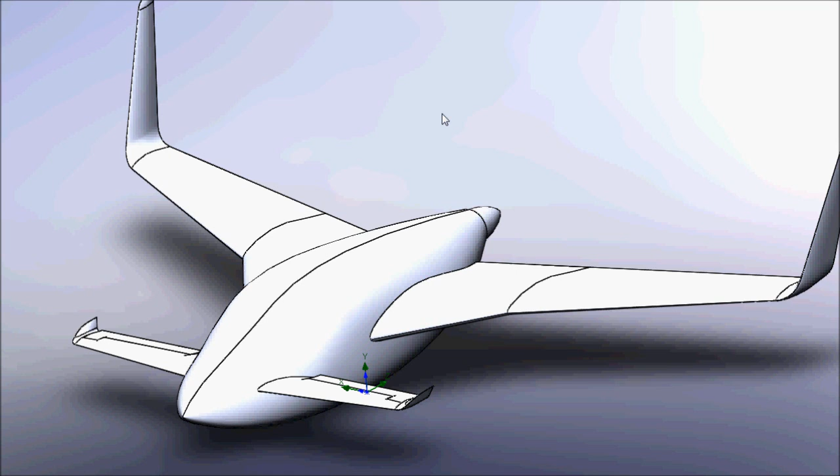We're going to ultimately be able to get the performance that I've been saying on the website. So as you see here, I've got the basic Raptor airframe here, and I've made it so you can adjust the elevator for each particular flow analysis, adjusting it up and down in relation to the pitch of the aircraft, so you're getting reasonable numbers from this flow simulation.

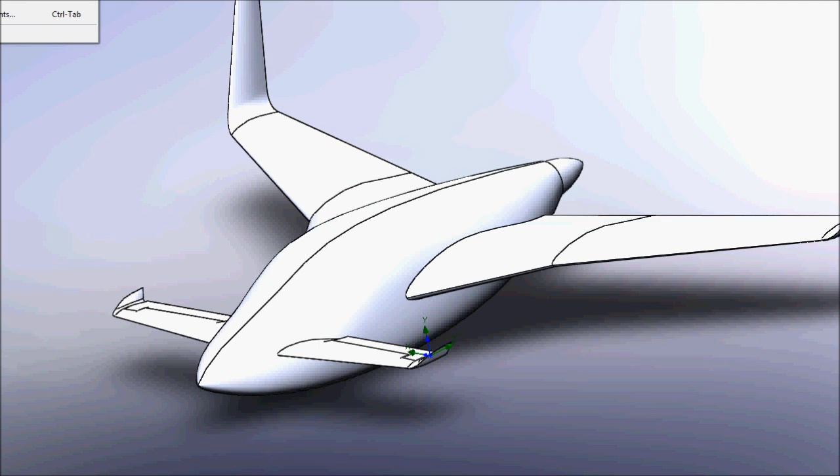If I switch over here, you'll see I also have the Cirrus SR22 that I've modeled here with the landing gear on it as well, and I've modeled the flaps for the slow speed calculations, and of course modeled the elevator as well.

I don't know the exact angles for the elevator for the different pitch attitudes, so I've had to estimate that for both aircraft.

For the slow speed handling of the Cirrus, I did the calculation at 70 knots indicated with 20 degrees of flaps, and all the other calculations are done with no flaps. Obviously on the Raptor there aren't any flaps, so I've basically set the elevator to what I think would be close depending on the angle of attack.

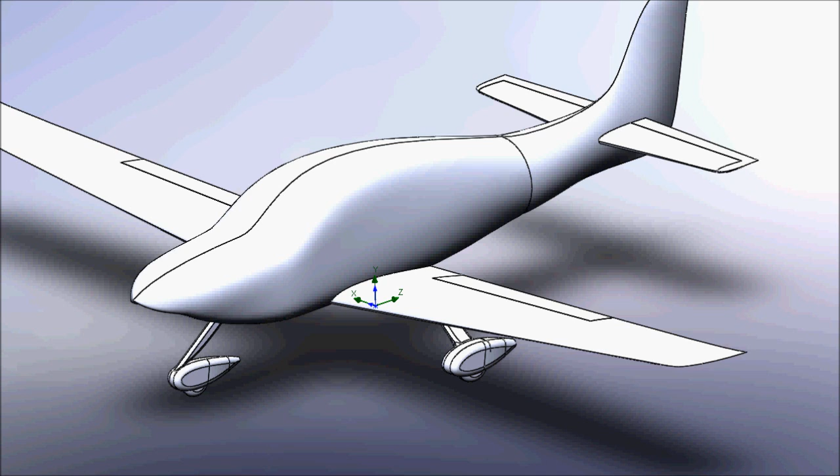That's kind of how it works. The way SolidWorks works with its simulations is you set up a simulation, adjust the airframe to whatever angle of attack you want, set the airspeed and a bunch of other settings, and choose the level of calculation - in other words, how long it will take and how detailed the analysis will be.

Then it gives you the results, and the results I've been coming back with are mainly the lift and drag, and also the pitching moment of the aircraft, just so I could see that it wasn't being pitched violently in one direction or another. That's how all the analysis is done.

Each analysis can take, depending on the resolution, anywhere from 5 minutes up to 45 minutes or more. So it's taken me a long time to go through all these numbers.

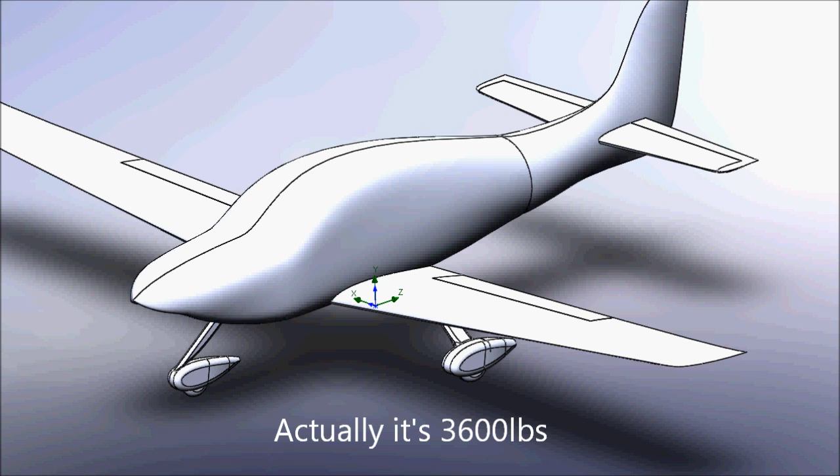I established a baseline whereby at a given angle of attack for the Cirrus, basically 0 degrees, at 185 knots indicated - slightly faster than the max speed of the Cirrus - I managed to get the flow simulation to tell me it was putting out exactly 3,600 pounds of lift, and give me the corresponding drag as well. Likewise I got the same number of about 3,600 pounds of lift with the Raptor, with about 0.65 degrees nose down attitude, at the same airspeed.

That was my baseline, and having that, I worked down the scale backwards all the way down to 70 knots indicated for the Cirrus.

On the Raptor I used slightly more angle of attack because it doesn't have flaps. The minimum speed I put was 75 knots, and I've charted all this, and it's up on the website. So that's an explanation of how I did everything.

So even though SolidWorks was giving me numbers in the low speed range that didn't match the amount of lift I was looking for in pounds - it gives the lift in newtons, but I was converting to pounds.

I wasn't really worried if it didn't give me the exact numbers, because really all I'm doing is comparing one airframe to another, and we know what the Cirrus can do. So I was just using those numbers from the Cirrus to extrapolate against the Raptor to determine what the Raptor is capable of.

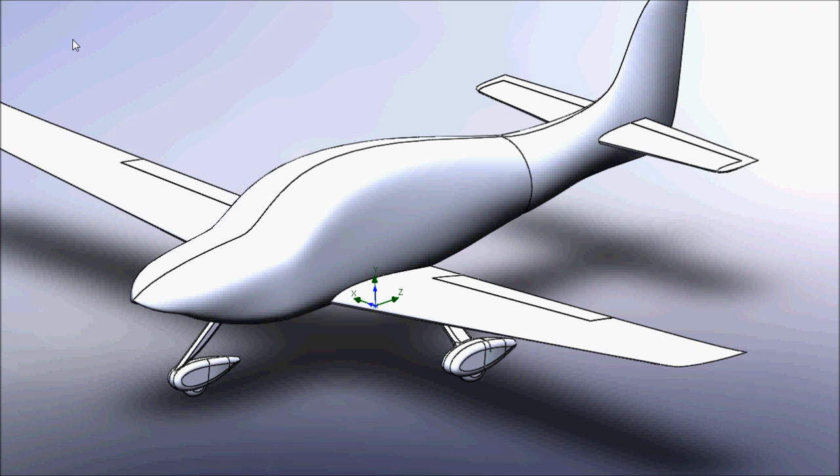So that covers the introduction, and in a second I'll show you some of the analysis results in graphical form.

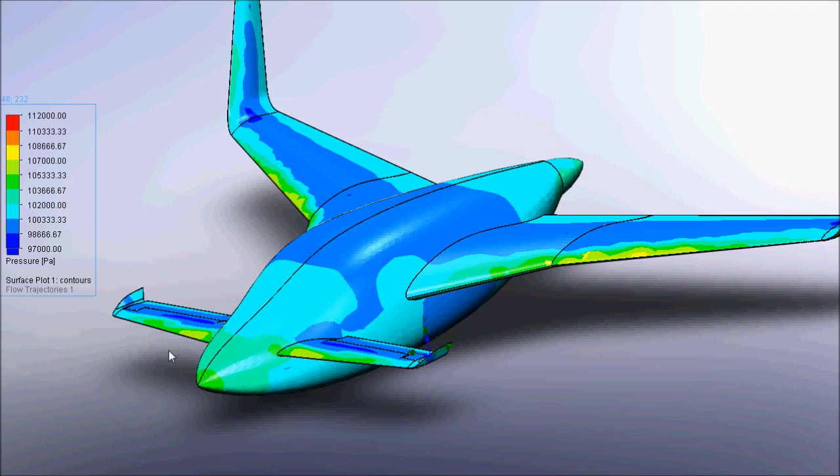Let me switch over and show you what the Cirrus looks like. Here you can see the Cirrus is fairly evenly distributed, although you've got areas of super low pressure right above the wing, which is where a lot of the lift is being generated. But notice on the leading edges here you have areas that are orange, areas of high pressure creating more drag, and also areas of slightly higher pressure on the landing gear, which creates a bit more drag as well.

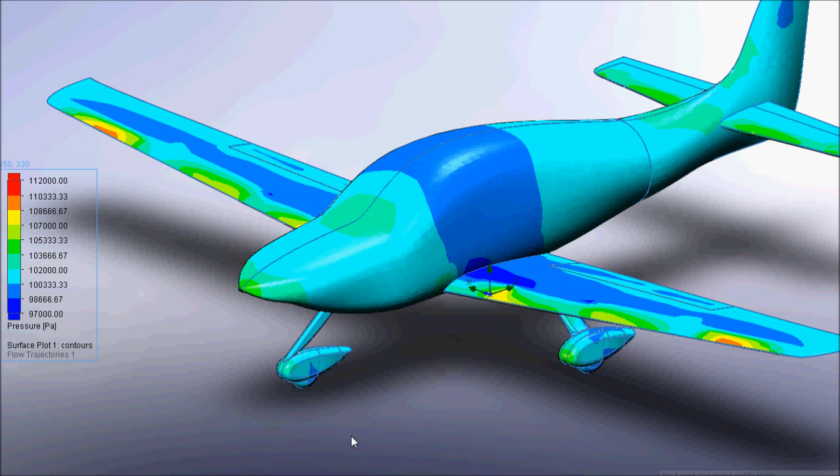So you can see from those comparisons that in general the Raptor has a much more even pressure distribution over the airframe. Next I'll show you a bit more about the flow analysis.

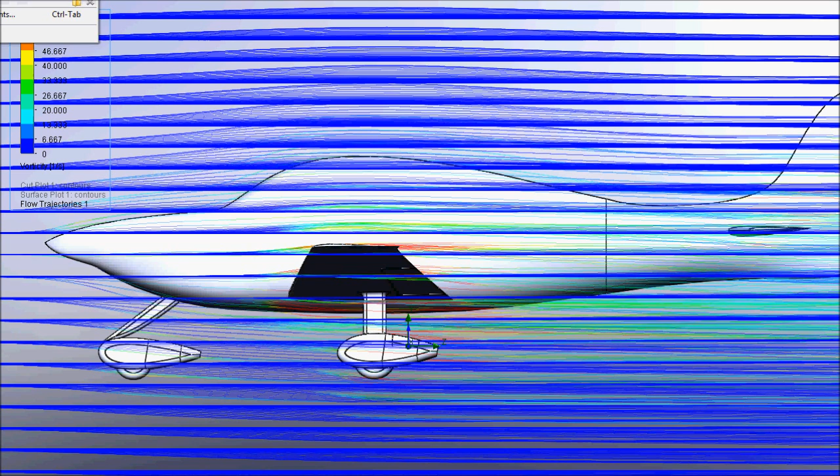So let's see, I'll switch over here and you can see how the Raptor looks, and it has the same type of problems and stuff. There's turbulence coming off the canard there because it's generating lift, and likewise off the main wing, but it's fairly smooth with respect to the whole airframe. There's nothing sticking out that's creating unnecessary turbulence. You're just getting what you need for lift.

And because the canard aircraft doesn't have a flap system, the main wing needs to have more area in general to generate that lift at low speed, and so ultimately at high speed it is not quite as efficient because it could be smaller, but it's not adjustable, so it is generating some drag there. But again, because you don't have this landing gear sticking out, and just in general because of the shape of the Raptor, you'll see it's generating less drag there, and you'll see from the chart there that these numbers come out from SolidWorks when you do the simulation.

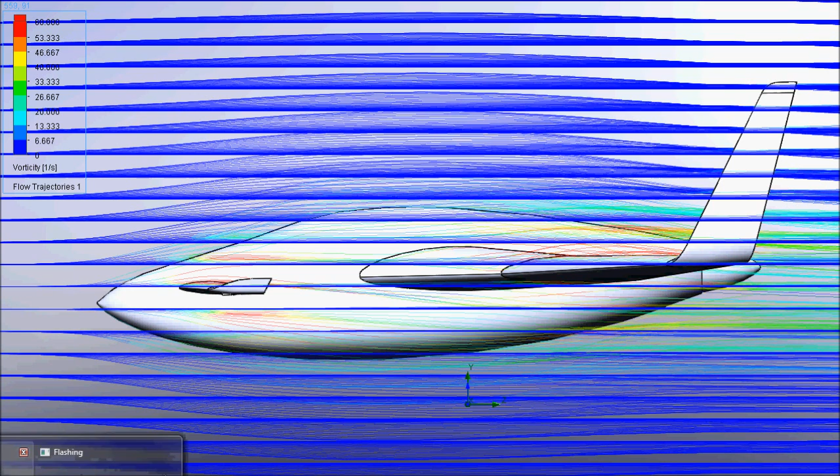So here next I'll show you what it looks like with the front view of the drag simulation here.

Okay, so here's the Cirrus with the front on view, and so there you can more easily see where the turbulence is being generated here. So these are all red marks here where turbulence is being generated from the lift over the wing, and you can see some of the red marks around here where the landing gear, and obviously some of the green marks.

And so there's a bunch of sort of generalized disturbance around the landing gear here, and then you've got the disturbance from the lift on the wing and then all the way out, and then underneath here, over here you've got your vortexes being generated from the wingtips on either side. And it's kind of interesting because they don't really use any sort of tips on the Cirrus, and they probably could and make some improvement to minimize those.

And then so you can kind of see that there's also some sort of orange colors here, isn't that? So there's kind of like a fairly messy bit of disturbance all around here, for various different reasons, the wingtips and the landing gear. Much of that is what's causing all this sort of swirl, and obviously all this turbulence creates drag, and that's what we're trying to eliminate.

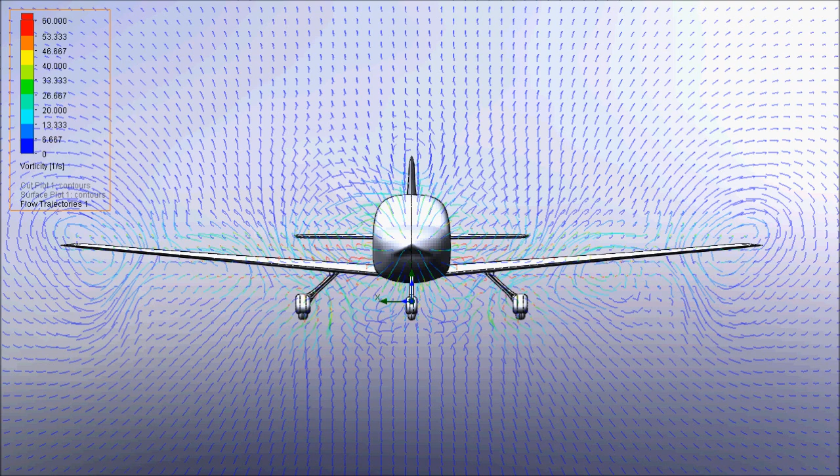So let me switch over here to the Raptor, and you'll see it's a much cleaner kind of look. Even though we have the winglets on here, they are still generating a vortex that sort of trails behind them, and you'll see that in a minute when I animate this. And then you're just getting sort of generalized turbulence because of lift, and most of that sort of trailing.

But yeah, it's fairly clean with respect to, or when compared with the Cirrus, and that's why, and you'll see on the chart there, and all the numbers that I have from all the simulations I've run, pretty much across the board, the drag for the same amount of lift is reduced by about 15% on the Raptor when compared with the Cirrus. So that's quite a large improvement, and that's why we're going to get the performance that I was hoping for out of this airframe.

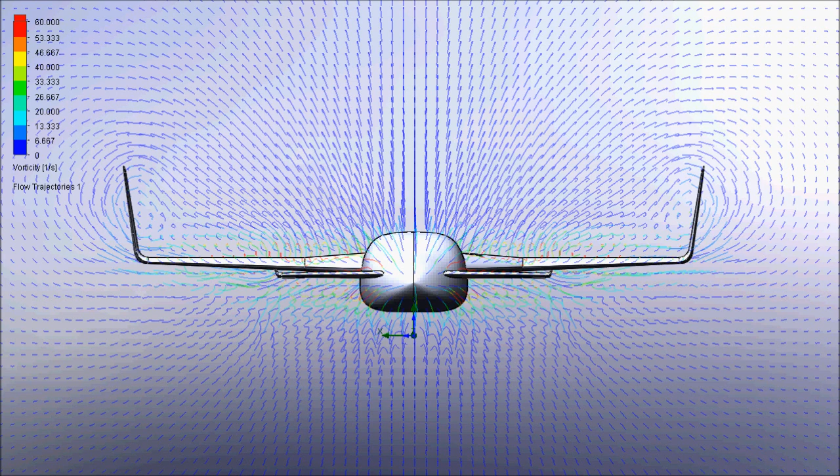So next I'll switch over and I'll show you the animation of how this all works. Okay, so here we're looking from the rear of the aircraft, and you'll see it animates the flow, and obviously the colors change with respect to the turbulence being created or the vorticity.

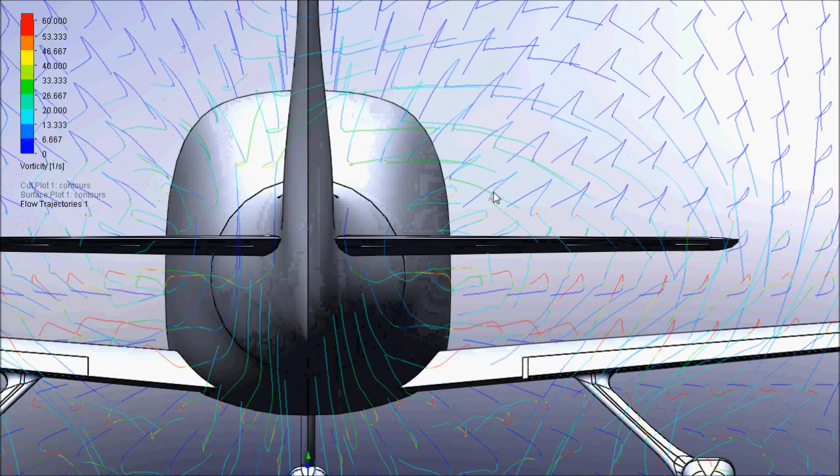So you'll see here, if I zoom in a little bit here, you can kind of see what's happening as the air comes down the airframe from the front to the back here, comes over the fuselage there, and sort of swirls around, and then of course it animates for another 20 feet or so behind the aircraft. So that what you see at the end there is what's happening trailing the aircraft.

So here you can see all the red lines, and that's basically where the turbulence is being generated from the lift there. And again, this is at 170 knots indicated.

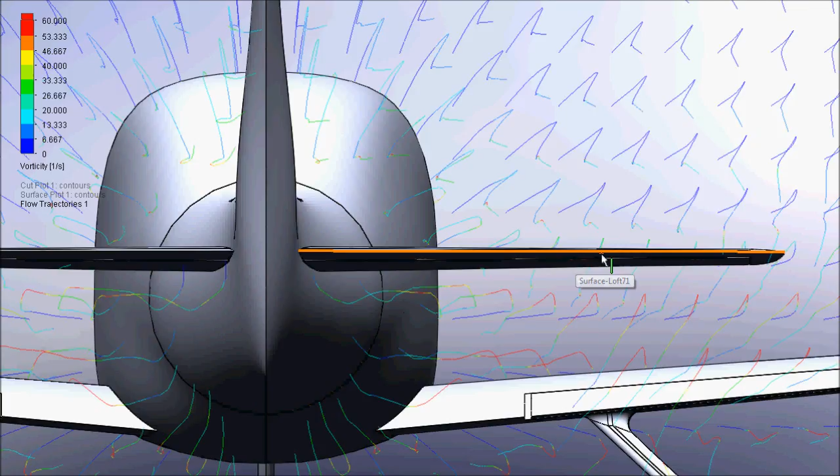So if I zoom out here and focus on the wingtip, you'll see here how the vortices are generated as the air crosses over the wing. It starts to swirl around like that. So it's kind of neat to be able to see that.

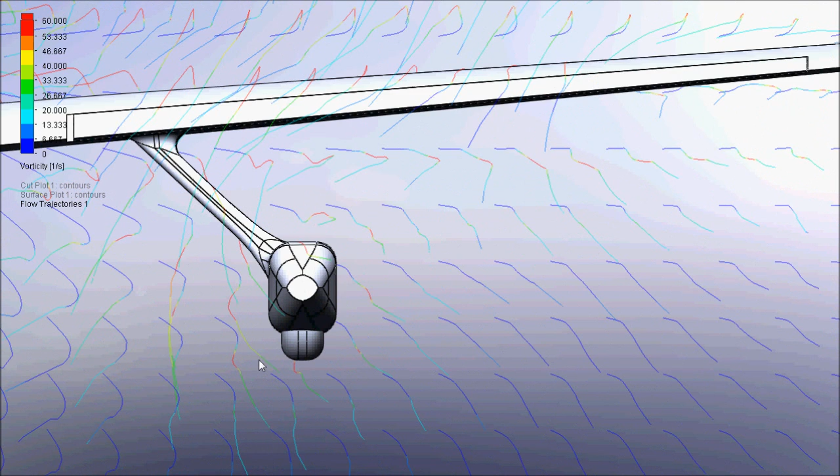So anyway, and then also too, if you look at the landing gear, you can see how as the air goes around it, it creates that turbulence, which is obviously creating the drag that is unavoidable with a fixed gear. And maybe it doesn't contribute a lot, but if you can eliminate it, then why not?

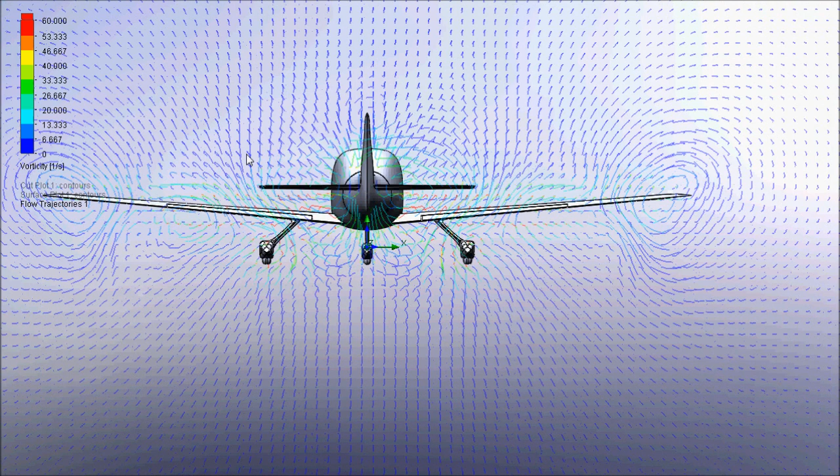So anyway, that's kind of how it looks if you're watching the animation of what happened there. And I'll switch over here and you can see how it looks on the Raptor.

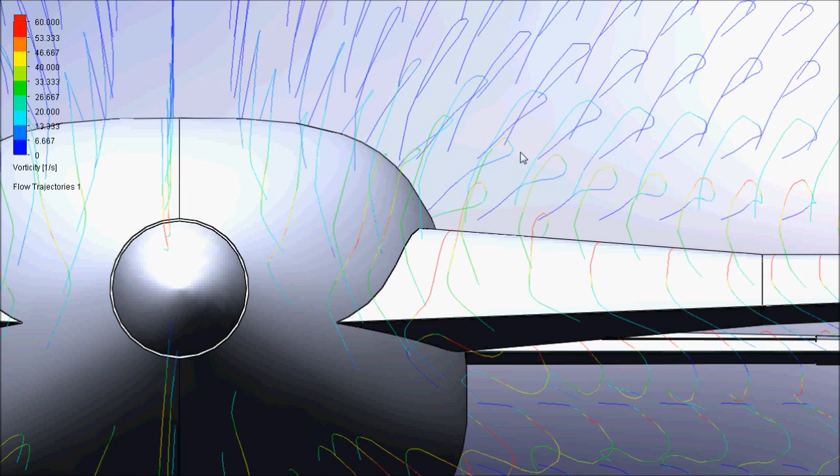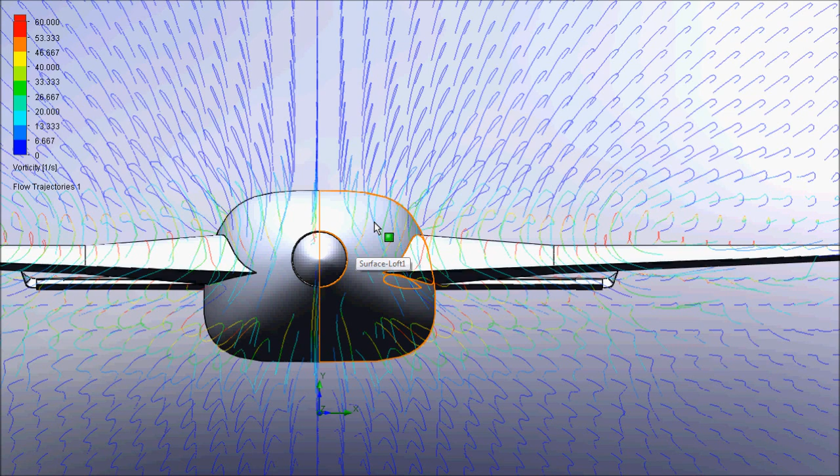Okay, so here we are with the Raptor, and you can see the same type of thing we saw before. We'll watch as the air comes over the fuselage and over the top surface of the wing, and you can see it swirls around a little bit, but there's only a minimal effect, nothing hanging down creating extra drag. And the larger fuselage isn't causing any problems or creating larger turbulence, because it narrows in nicely, like a smooth transition from small to large back to small again up the tail.

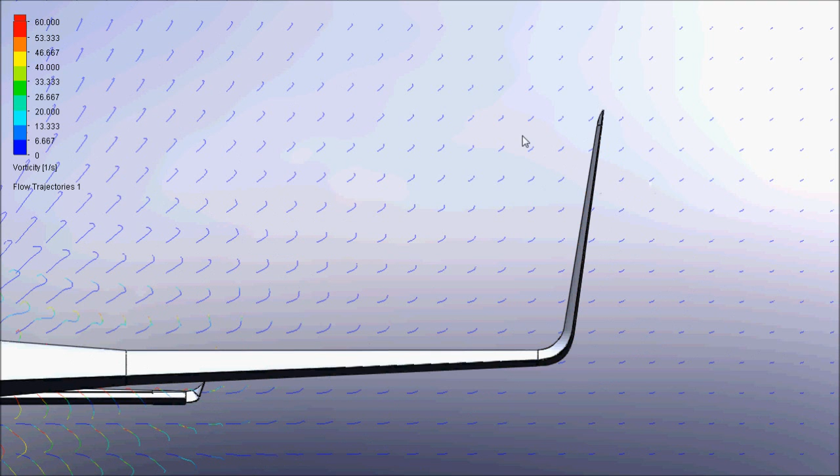So then you look at the wingtips here, and you'll see the vortex is pretty much coming from here as opposed to here, but you get a similar sort of effect, and I think it's kind of unavoidable. Anywhere there's generating lift, you're going to create a vortex, and this is set up to generate minimal lift. It's a very thin, narrow airfoil, so it's not going to create as large a vortex as what you would have just straight out on the wingtip over here.

So that gives you the summary there, just showing how the flow is going over the airframe. And it's kind of neat to be able to see that and see if there's any problem areas creating any sort of weird turbulence, but it looks fairly clean, at least in my eyes. I don't think I could improve on it anymore at this point.

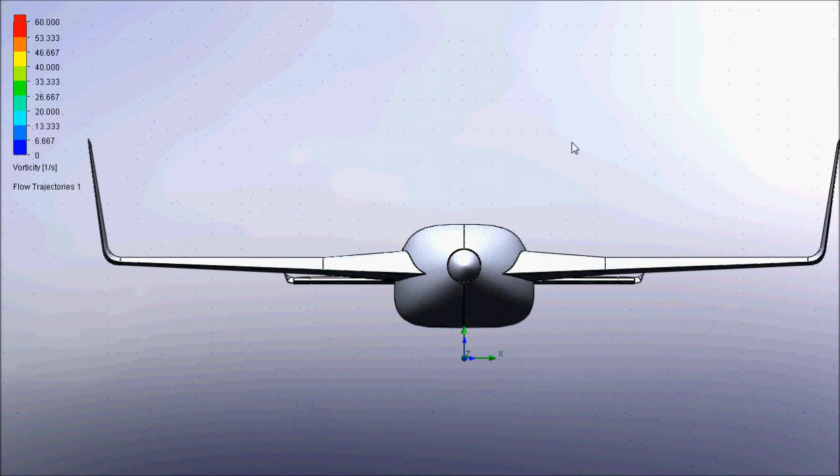So next I'm going to show you some of the data here, or at least the plotted data that I have, and explain what that tells us.

Okay, so here's a little bit of the data that I collected with all the simulations I was running, just to give you an example of what comes out of SolidWorks and what I was selecting. So here I've got the Raptor at 185 knots and level 6 simulation, which is fairly high. The angle of attack was negative 0.65 degrees, and this is the data you can export out of there. Obviously there's a lot more, but all I was choosing here was the first line is the lift, the second is the drag, and the next is the rotational moment, pitching moment.

And what I did over here, these numbers are all in newtons, so I'm taking the average value and multiplying that by 0.225 to convert it to pounds. So the lift here is 3,602 pounds, and the corresponding drag is 1,616 pounds, and the lift to drag ratio was 2.22, and again that was at 185 knots.

And for the Cirrus, same type of simulation, level 6, and this was at 0 degree angle, and I experimented with different angles, and that was the one that produced the number I was looking for in terms of lift. So I got 3,649, so almost the same amount of lift in pounds, and the drag was 1,913 pounds. So you see the lift to drag ratio there is much lower, 1.9, and obviously the drag is higher.

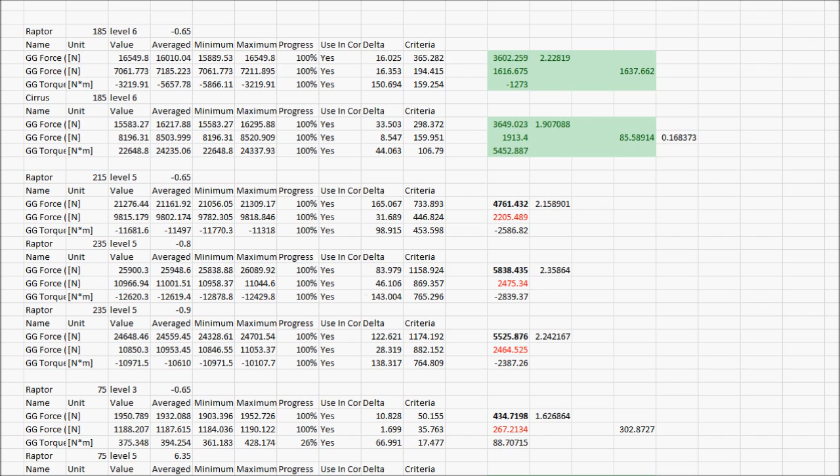It turns out in these numbers over here, basically what I did was I normalized the drag based upon the lift to get a 1,637 normalized against the Cirrus, and then I took that number and compared it with this, and I see that it's 85% of that. So the 1,637 is 85%, so we've got a 15% reduction in drag. I have loads of numbers that I've done on this to get all the information, but next let me show you this chart that I have.

Okay, so this is the chart that I generated from the data, and I didn't put all the data on here because it would have gotten too messy.

I took some data points, there's my initial point at 185 for both aircraft, and then I did the minimum or stall speed on the Cirrus at 70 knots, and 75 knots for the Raptor because it'll have a slightly higher minimum flying speed, even though it doesn't stall, minimum flying speed.

And then I plotted the lift up here for both, and you see I also plotted some extra ones in here, at 175 knots for the Raptor, and these high ones here, 215 and 235 knots again for the Raptor, just because I wanted to throw some extra numbers in. I didn't think there was any point doing that on the Cirrus because it doesn't go that fast.

So really what I wanted to do, as I was telling you before, ultimately it would have been nice to be able to prove that I could have 3,600 pounds across the board here, but for some reason I can't get SolidWorks to give me that, so I think I'm doing something wrong with my calculations or whatever. But the fact that I could prove this baseline of 3,600 pounds of lift at what would be the maximum cruise speed was really the point that I needed as a starting point.

So really it doesn't matter how SolidWorks calculates this. I'm just comparing one airframe to the other and using that to determine the percentage improvement of the Raptor over the Cirrus. Here you can see the drag curves, the red one is the Cirrus and the orange one is the Raptor, and you can see pretty much across the board it's a 15% decrease in drag.

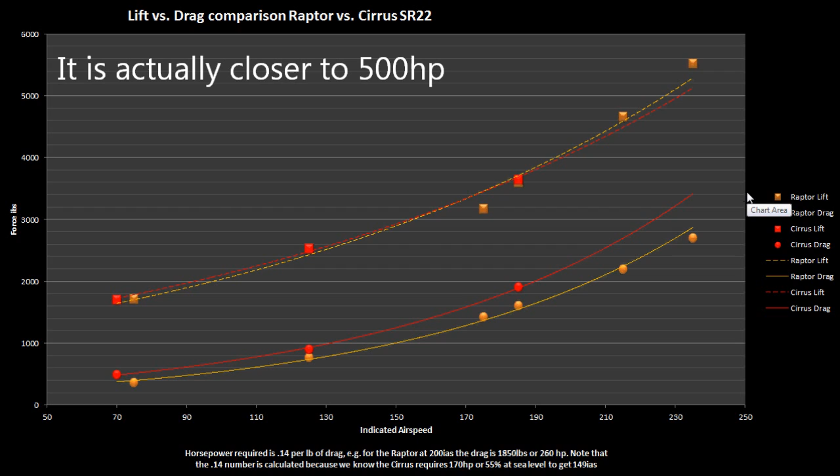I did a calculation for getting 250 knots indicated, and you would need about 500 horsepower, I think was the number I came up with. But you could extrapolate this chart and figure it out for yourself.

These numbers may vary by as much as plus or minus 5%, but I think they're fairly accurate, because every time I went with the Cirrus and took the book numbers for 65%, 75% and 55% power, and used the true airspeeds they provided at altitude, converting them back to indicated airspeeds and plugging that in, I was literally hitting the chart every time and getting around the same 0.14 number. It might vary a little—sometimes 0.135, other times closer to 0.15—but it's somewhere in there.

So I think I've achieved what I wanted to do with this airframe. We're going to have a 300 knot aircraft that gets there on about 260 horsepower, which is actually better than I thought, because I expected we'd need about 300 horsepower, but we should be able to get there at 25,000 feet on about 260 horsepower if everything goes good.

One of the other things I was interested in looking at on this chart—everybody knows that drag increases with the square of your speed. So I was doing some calculations here, and it's not quite that, because if you're at 70 knots over here and you go to 230 knots, the drag here, if it's just under 400, should be going up to about 3,900.

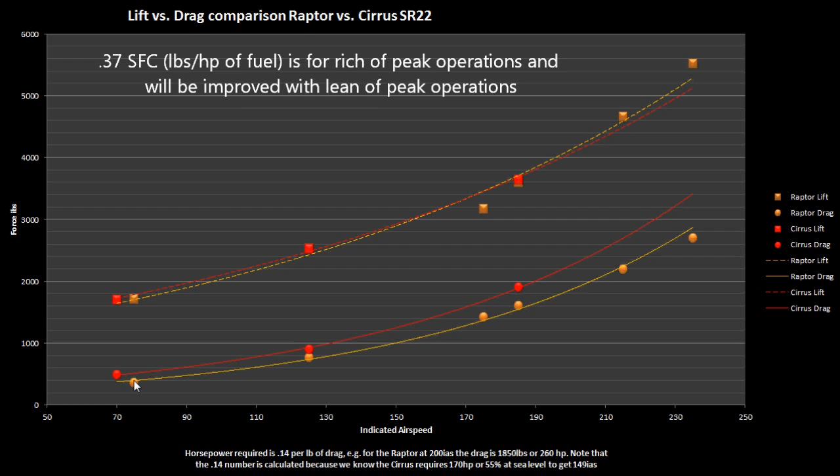At that airspeed in the Raptor, you'll be doing 300 knots or 345 miles an hour, and you'll be averaging about 21 miles to the gallon.

And of course, if you pull the power back a lot, that's when you'll get even better numbers. We were doing some calculations yesterday and managed to see about 27.5 miles to the gallon if you pulled your indicated airspeed back to about 170 knots indicated, which would be about 250 knots true, I believe—I can't remember exactly, that's just off the top of my head, but we were seeing about 27 miles to the gallon.

That's kind of nice, and it's going to be better than your car. If you think about flying in a straight line instead of driving around roads off your beaten path, you're actually doing much better than 27 miles to the gallon—probably more like 35 when comparing to a car. So it's going to be environmentally friendly as well.